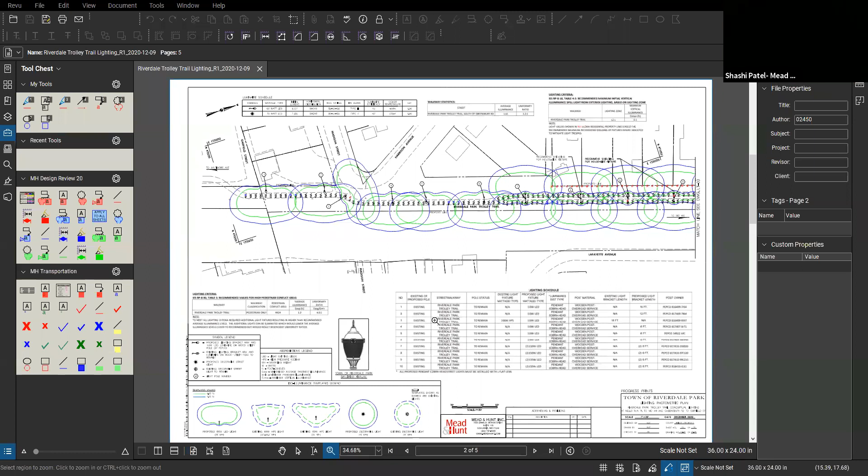Okay, so I'm Jeff Weaver. I'm with Mead and Hunt. I'm the project manager for street lighting for Mead and Hunt. I have 37 years of experience designing and managing street lighting projects, basically anything exterior lighting. I'm also a member of the Illuminating Engineering Society of North America, and I'm a member of the Illuminating Engineering Subcommittee for Standard Practice.

So basically, I guess we can start from south to north. So the town has asked us to look at a conceptual lighting layout in which we would utilize the existing power company utility poles to install fixtures on those poles. It's the majority of the trail. There are some areas where we do not have utility poles available, so we're recommending that we install town-owned pedestrian style lighting fixtures, which is basically this fixture that's on the screen now.

So we did a photometric analysis where we looked at the light levels, projected light levels, I should say, throughout the trail with different locations or layouts of fixtures. And what I mean by that is we looked at positioning the fixtures on the utility poles in different directions to try to minimize spill lighting. So ultimately, the layout you're seeing right now is what we've come up with, which we feel is probably the best we can do with the utility company provided light fixtures.

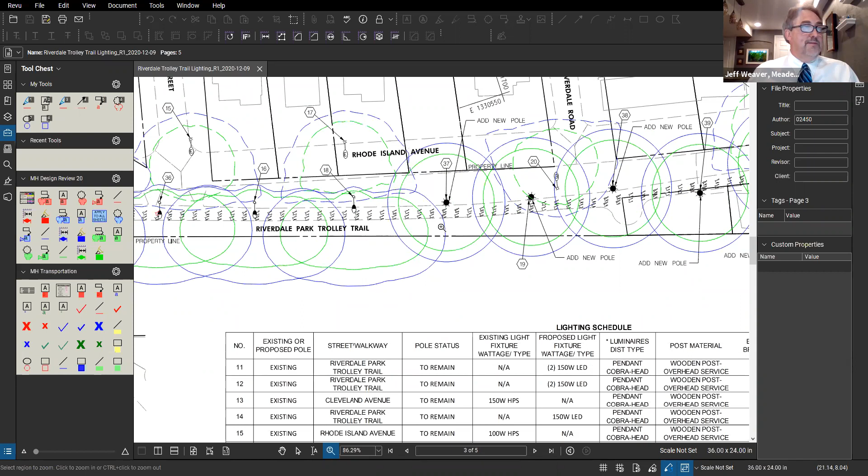Let me see, is there anything else I want to point out? The lighting goes all the way north, up to Wells Run Place, where the developer has already installed a number of pedestrian lights. And that's basically where we'll tie into the path.

As far as the light levels, let me go back here. We looked at the Illuminating Engineering Society's recommendations for lighting on a path. We determined that the path would have a high nighttime pedestrian usage. The Illuminating Engineering Society RP8 Table 5 recommends for high pedestrian conflict 1 foot candle illumination all falling on the path with a uniformity ratio of 4:1.

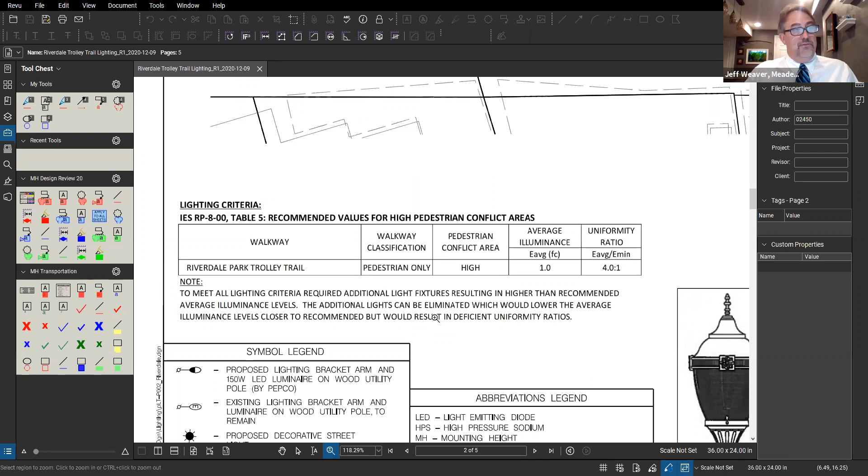When we say uniformity, what we mean is how consistent or how even the lighting is. We don't want peaks and valleys. We don't want areas with bright spots, and we also don't want areas that are dark, because that would allow somebody potentially to hide in the shadows and then attack somebody on the path at night.

The layout that we developed, again using utility company poles, did allow some light spill on some of the residential property lines, as you can see on my screen, mainly slightly south of Queensberry. There's a number of homes, maybe 6 homes, where there is some spill light on the residential property line. There's also an area north of Queensberry, a total of 3 homes, and that's what these red numbers are indicating, with some spill light on the residential property.

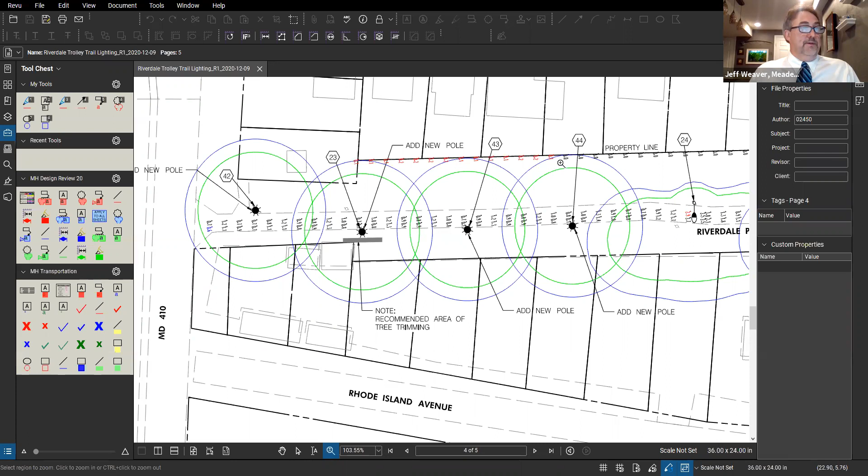As you can see here, the pattern of illumination again is very circular. Along this particular residential property line it's not as bad; it's actually very minor, to be totally honest. The problem really lies to the south, where we have the twin arm structures. There's a lot of spill lighting in this section. One of the problems is we're restricted by what we have available. The utility company poles are already there, so there's not a lot we can do about that if we're going to use them.

One way we could mitigate this would be to provide shielding on the fixtures. Potentially, we could have the vendor change the optics in the fixture, but I would caution, since these fixtures are provided by the power company, we lose some control. The power company really has the say. This is the particular fixture they keep in stock, so they may not be willing to change out the optics or provide a different fixture. So there's a good chance we're stuck with this fixture if we go this option.

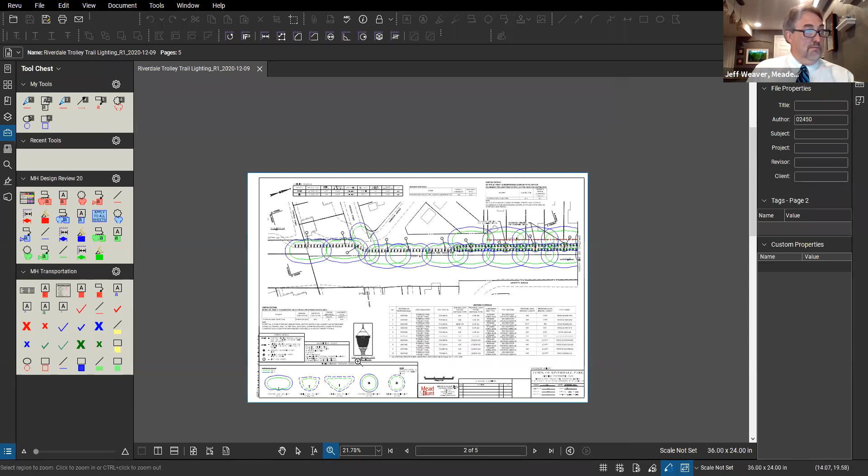I guess the third way to mitigate this would be to not put these in and just put in a pedestrian style lighting system consisting of the town's Washington Globe style fixture. Now, I would caution with that option. I'm not sure if Ivy's on the call yet, but I think the cost Pepco's provided for their lighting is around $48,000. A pedestrian only style lighting system would probably cost upwards of $500,000. So it's considerably more.

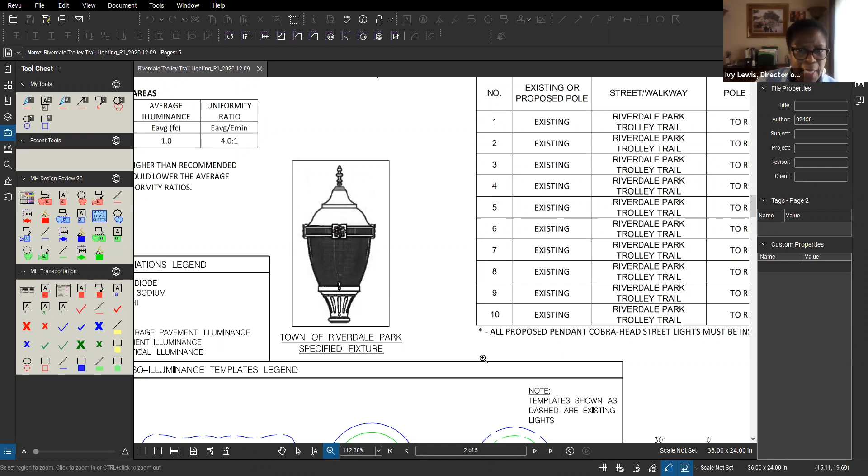I am back on the call. My apologies, everyone. Could you explain why the cost would be substantially higher if we go with pedestrian style lighting or town-owned lighting along the trail? It could be obvious to some, but not to others. Yes.

So basically, let me tell you the difference. So when we have this type of situation, we're using a utility pole that's already there today. The power company comes in and they install a lighting arm and a fixture on that utility pole, and then they charge the town basically a tariff or a lease fee. So the cost is not that great. There's initial upfront cost, and then there's a monthly cost for the energy use and the cost

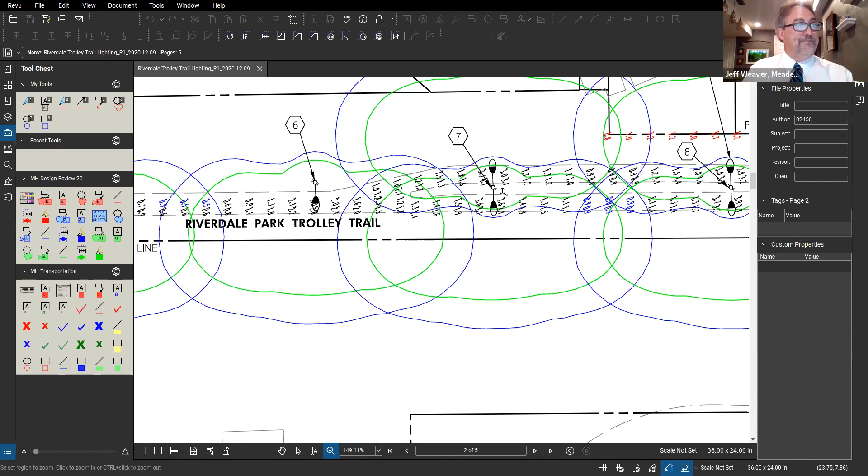for leasing the equipment. When we're talking about a pedestrian lighting system, what happens here is we're paying for the fixture, the pole, all the underground infrastructure. In other words, the conduit and the hand boxes, electrical cables, a source of control. In other words, a lighting cabinet that would turn on and off the lights. Also a source of power to energize these lights as well. So all these components come together. They create a much more expensive lighting system.

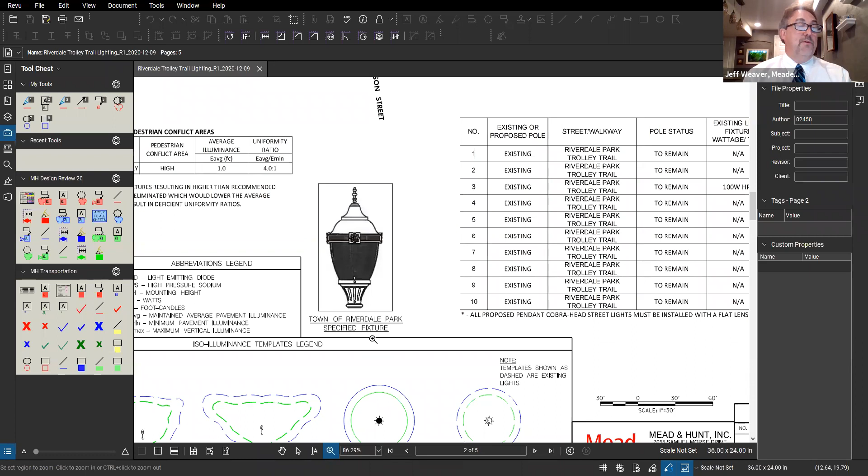But with that type of lighting system, there's obviously a lot more flexibility that you can provide any number of types of fixtures out here. We can go back to the vendor and they can change the optics in this fixture, instead of a circular pattern like we see here, we can actually make it more like an oval pattern, something that falls almost directly on the path. It cuts it off. There's not a lot of this spill lighting.

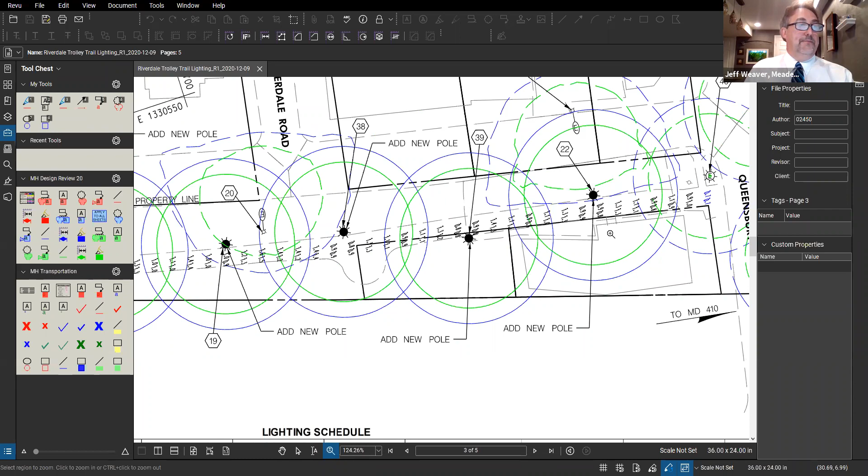So that's the benefit when you build your own lighting system instead of using the power company. We're very restricted by what the power company provides. Does that answer your question? That certainly, yes, provides more detail to what would be involved in extending town lights along that section of the pole and the wiring and all the infrastructure that goes along with it.

And so another downside of that is we have a number, I don't know the exact number, if you do call it out, Jeff, of the number of poles along the entire length of the trolley trail in Riverdale Park. And so to introduce town lighting or intermix it in with that for a different lighting pattern and illumination would just create a lot of pole clutter, if you will, along the trail. It would definitely create a lot of clutter. There's also the concern with color temperature.

If you're going to mix and match with what Pepco has and what the town has, you're definitely going to have two different color patterns. Pepco's is a 4,000 color temperature. And let me explain what I mean by that. So basically, when we talk about color temperature, we're talking about how warm feeling or how whitish the light is. If you're in a 2,000 color temperature, that's more yellowish. And then from that point going up to say 5,000, you get into like a bluish color. Right now, Pepco again is 4,000. The town's fixture is 5,700. It's very white. It's almost bluish. It is quite bluish.

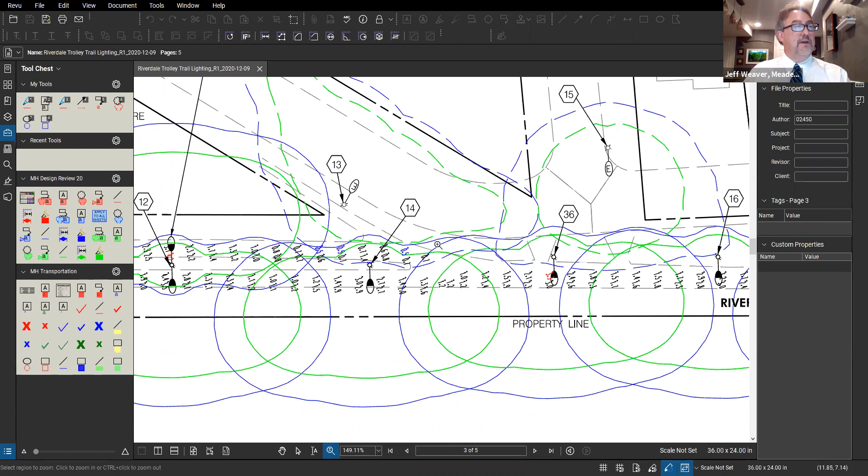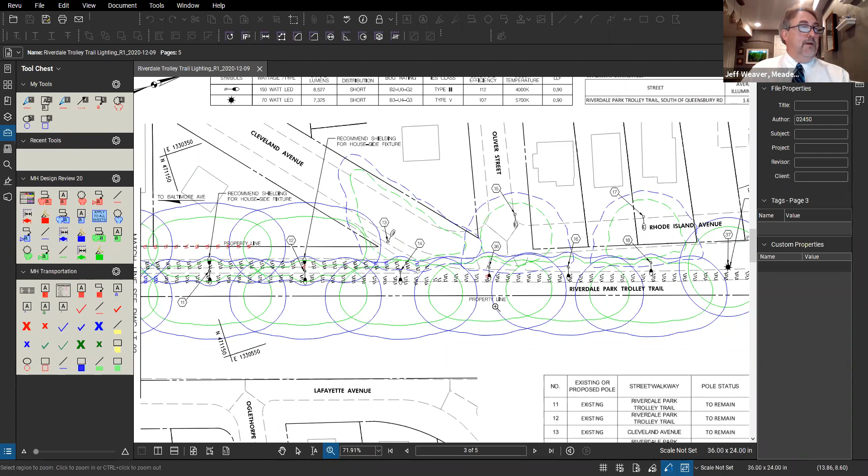Now, the Illuminating Engineering Society has actually gone away from calling these light patterns. Now we're using BUG ratings. So it's basically looking at how much light is thrown forward, how much light is thrown backwards, and how much light is allowed to go up in the sky. But I want to caution, I don't want people to get confused when we talk about color temperature and think that it has anything to do with pattern of illumination. It absolutely does not.

Pattern of illumination is driven by the lumens that this fixture produces. And there's a number of components that actually drive that. The optics in the fixture, the ballast, and how many milliamps that fixture is operating on actually create how much light falls forward, or how much light goes in an elongated pattern left and right, or even on what we call the house side, behind it.

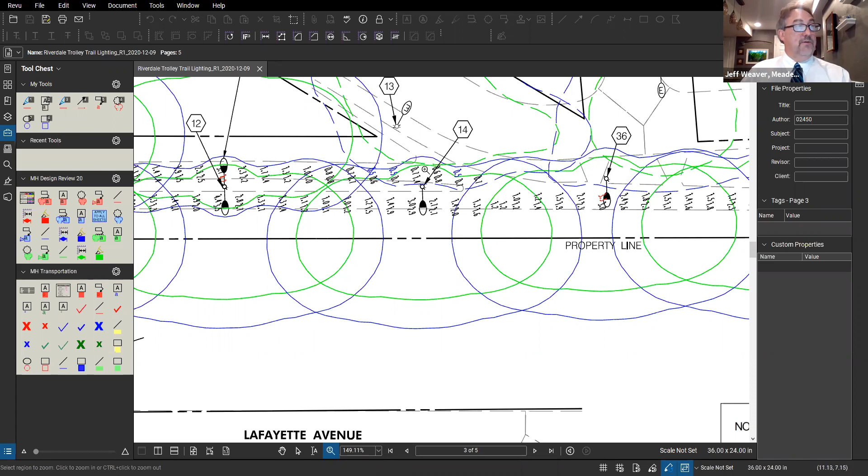As you can see here, this pole in particular, here's the utility pole, the light's facing this direction, and all the light is forward of the fixture. But there is some light that we call house lighting that falls behind it. But again, this is Pepco's fixture. This is what they provide.

I do want to point out, as you mentioned, but I just want to reiterate that in the current plan, there are two color temperatures. Within the town center and where the new pedestrian lighting or town-owned poles are proposed is one temperature in a concentrated area. And then on either side of that, it's the lower color temperature of the Pepco light. So it's not so variable along the trail, but it does vary right before and right after, or around the town center, I should say.

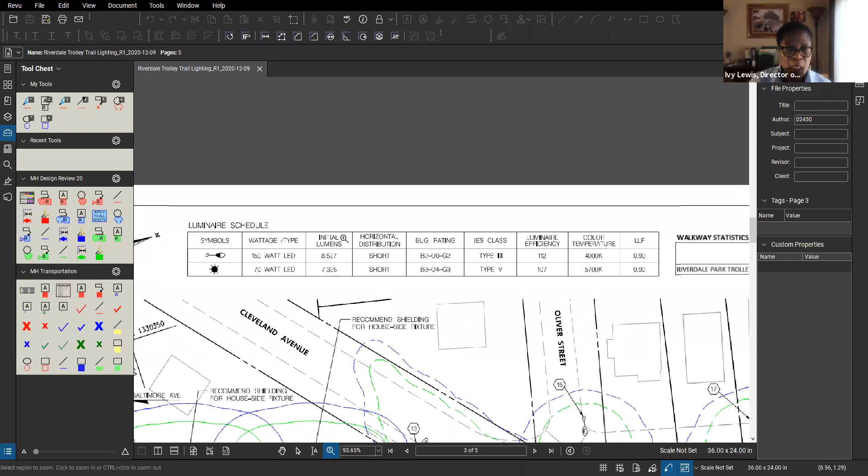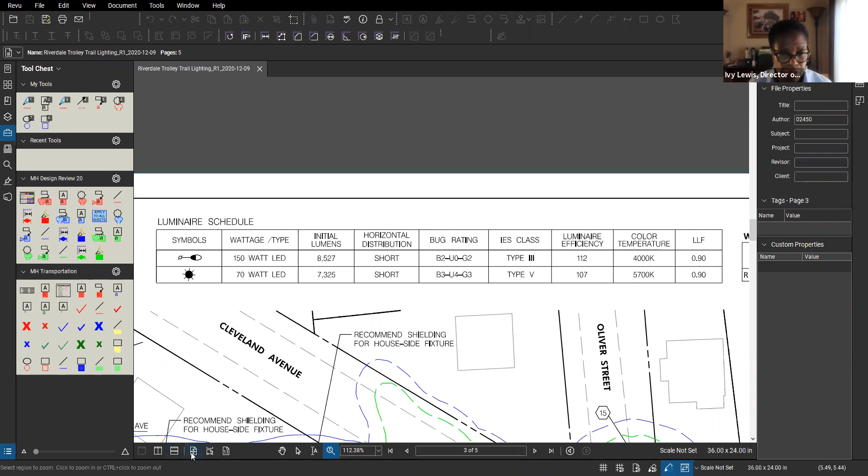Correct. The town center, and it makes sense, high pedestrian area. We have a lot of locations of interest. We have that lighting there now within the town center, and to a less extent under the overpass. That would be extended a little beyond that where the new lights are being proposed, and then it would drop down to, if you will, the warmer temperature on the Pepco poles in both directions. Yeah, so basically, that's correct.

Everything that's in this area we're not showing because it's all existing. There's all town-owned lights in this area here. These are the pedestrian lights, and there's actually a few, I think 2 or 3, that are underneath this underpass here as well. So then when the path starts off on the north, it kind of ties into that same style of lighting until we get to the utility poles, and then we transition to just utility company lighting to the north.

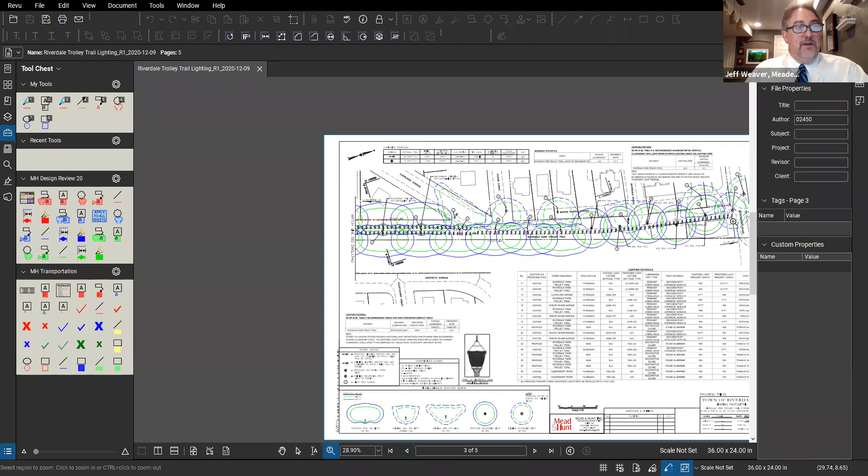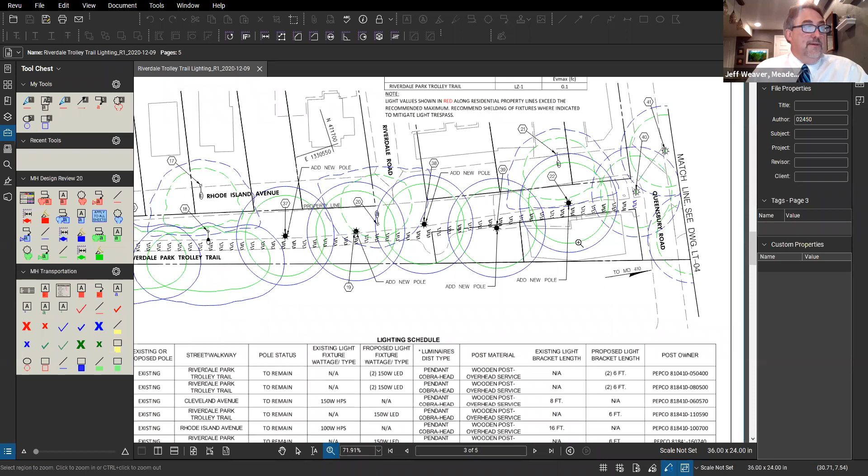The same thing from the south side. As you can see where Queensbury is, there's existing pedestrian style lights that run up and down Queensbury, as well as onto the match line here, the town center. And then to the south, we tie in with some of these pedestrian lights before we go into the utility company lighting. And the main reason we did this, again, we don't have any utility poles in this area that we can utilize to put utility company lights on. If we don't do something, this whole section of the path would be basically dark. And the same thing to the north, the start of the path in this area would be dark because we just don't have any telephone poles to utilize.

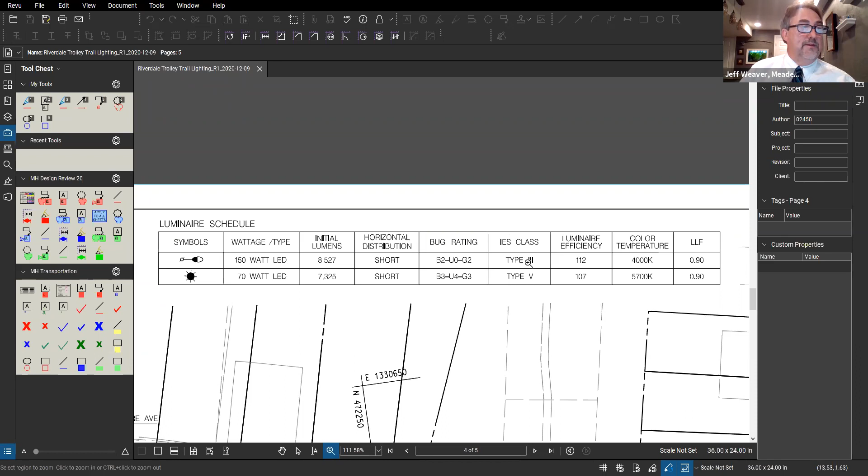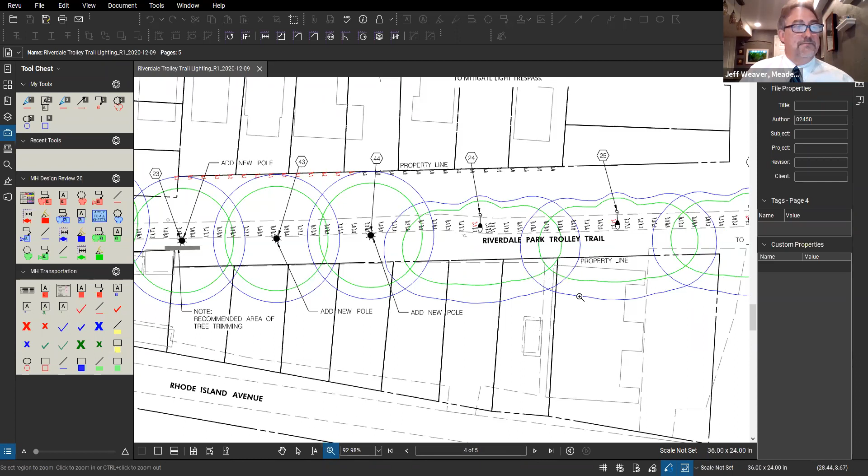And by the way, I zoomed in on it. This chart up here gives you the color temperatures for both the fixtures. So this is the Pepco light over here, 150 watt LED, has 8,500 lumens, and it's 4,000 color temperature. And then the town's is a lower wattage fixture, 70 watts, 7,325 lumens, and it has 5,700 color temperature, which is more bluish. And again, these are the patterns of illumination I was talking about, the type 3 and the type 5. This would be the type 5, the round, and then the type 3, I guess I want to say egg-shaped. It's an easy way to say it.

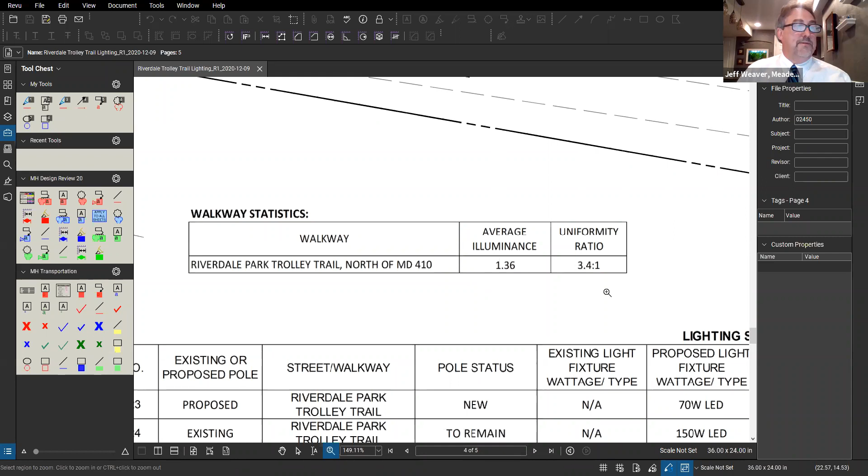I guess generally, I think that's it. Other than, I want to point out, as far as the light levels on the path, with the layout that we have right now, we're slightly above the minimum recommended. The minimum recommended is 1 foot candle. We're 1.36. So we meet what the Illuminating Engineering Society recommends. And then the uniformity, this is a maximum number. We don't want to be over 4, because if we go over 4, then we'll start seeing some dark spots or bright spots. Right now we're 3.4. So we meet what's recommended.

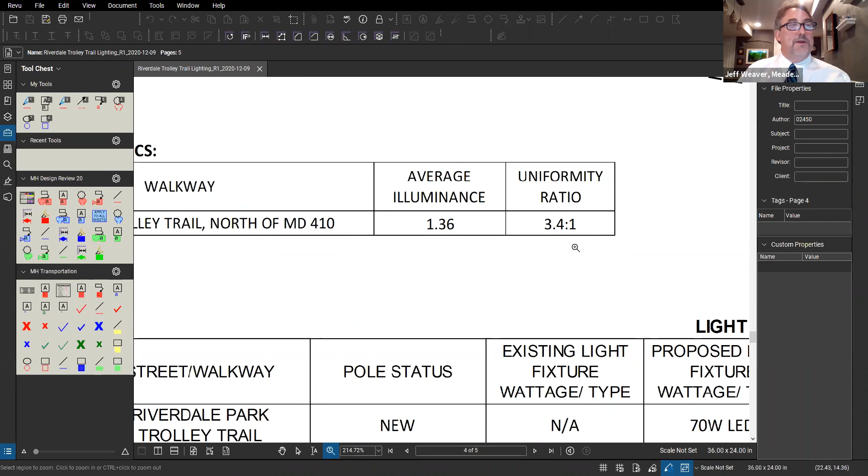Okay, so the lighting system that we're proposing here pretty much meets every aspect of what the town is looking for, except we've got these couple spot areas of light trespass or light spill on these residential property lines.

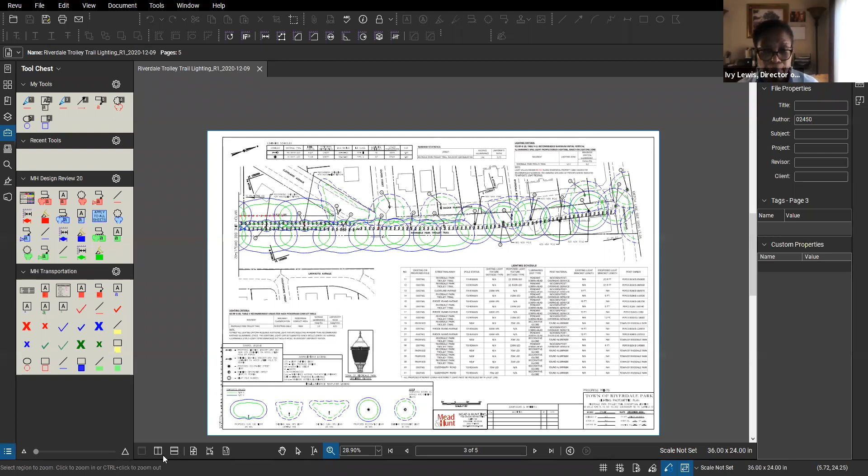So, I don't know if there was anything else you wanted me to add to that, Ivy? I'm going to say no, and maybe if questions come up, you could provide additional information. Since I fell off, that was a first to lose internet access completely, I did want to make sure to share with attendees the objectives and the thinking behind, or what guided the effort to prepare this plan.

Clearly making the trolley trail safe for all users and encouraging increased use of the trail, including after dark, to businesses and other points of interest, are major aspirations of this project, as is minimizing the impact on adjacent properties. Some of the other objectives are using energy efficient lighting, establishing appropriate light levels adjacent to single family homes, and utilizing existing poles to the extent possible to avoid pole clutter, while at the same time only using the minimum number of Pepco poles and supplemental town lights necessary to adequately light the trail.

I will mention that these goals and objectives are consistent with a study I learned about just a couple of weeks ago. It was a crime prevention through environmental design study completed by the College Park City University Partnership in 2017. The study focused on making the trail safe along its entire length through College Park, Riverdale Park, and Hyattsville. And as we know, except for in the Riverdale Park Station community, where the last section of the trail was built and lit over the last 12 months, most of the section of the trail in town is without lighting.

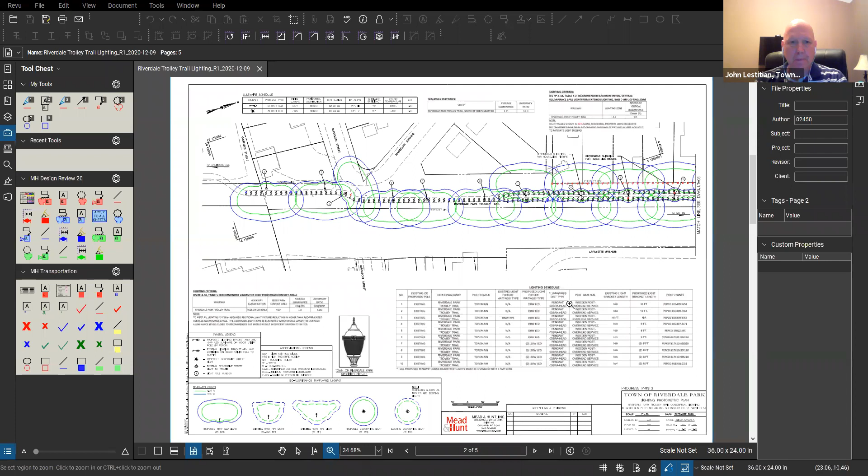And Ivy, there's a number of questions in the chat box. Okay. So if you could take a look in chat and respond to those. Okay. Let me start from the beginning. When is the proposed installation date?

The town, as Jeff mentioned, has to do all of the design of the wiring and supporting infrastructure for the town lights. So that has caused us to break the project in two parts if we proceed according to the conceptual lighting plan. So we would get out the box first with the 33 Pepco lights on, I think it's 21 Pepco poles. Once the town signs a cost letter that Pepco has already provided, and pays the $48,000 cost of installing the lights on the poles, they'll get started, and we could expect to have them fully installed within 6 to 8 months. The timeline for getting the town lights installed has not been established.

We have to first determine whether the existing infrastructure, for example, there's a control box in the town center, we have to determine the capacity of that to support additional lighting. And if not, we'd have to do the engineering on installing another control box and extending wire to the lights, or maybe multiple pedestals, rather than a control box of the size that's in the town center, on either side of the town center to support the lights that are proposed there.

So we could definitely have the Pepco lights in place before the end of the year, maybe even the end of September, if we get a cost letter signed within the next couple of weeks. And I would be venturing a guess to determine when the town lights would be in. Ideally, we'd have those in before the end of the year. Next question, or any comments on that? Okay.

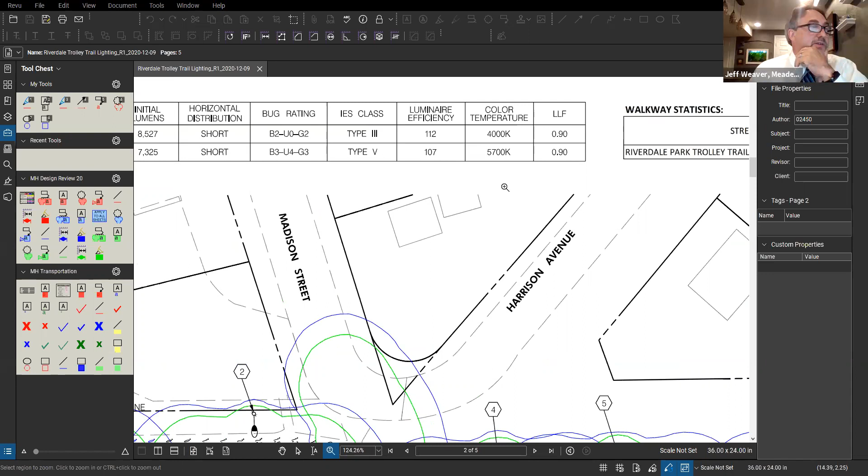So what light is more energy efficient? We're proposing the use of LEDs. Do you want to address the other options here? So the town, okay, go ahead. I could just point out real quickly, if you're looking at the chart, the Pepco light is actually more efficient, but just slightly. The Pepco light has a 112 efficiency and the town's light is 107. And that's because they're both LED light fixtures. If these were incandescent or high pressure sodium or something like that, this number would definitely be way down in the 60 or less range.

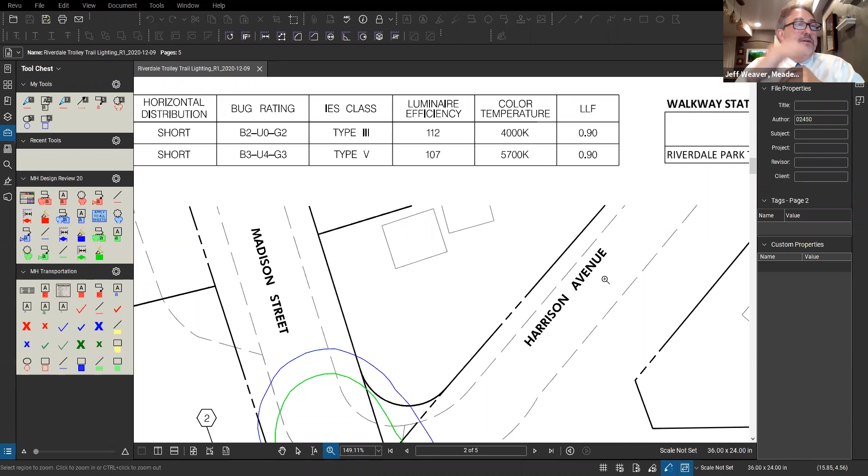Okay, the next question, what is the height difference between the pedestrian lights from the town and the Pepco lights? So the Pepco lights are generally installed around 26 feet. That can vary slightly depending on what the power company has on their utility pole, but they do have a designated area on the pole that's around 26 feet. It can be as high as 30 feet. But that's really up to them to decide.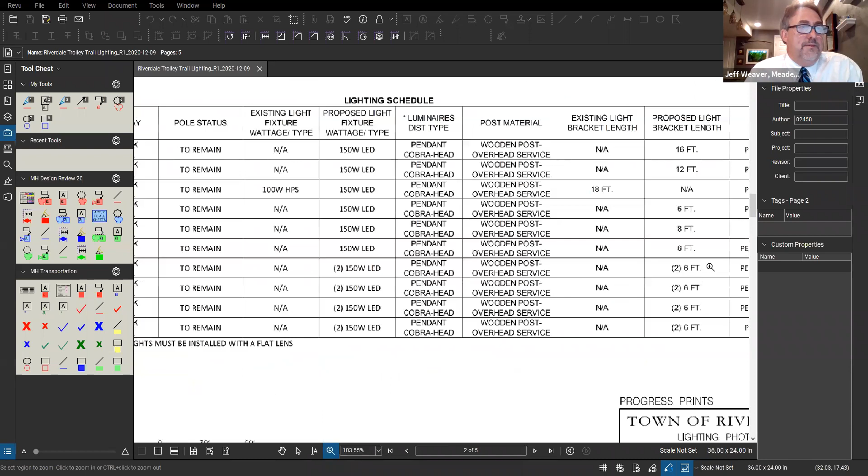The town's pole, let me make sure here, I believe it's 16 feet. Wait, is that right? No, that's not right. It's on the chart here. I believe it was 14 feet, but I want to make absolutely sure. We put it on the chart.

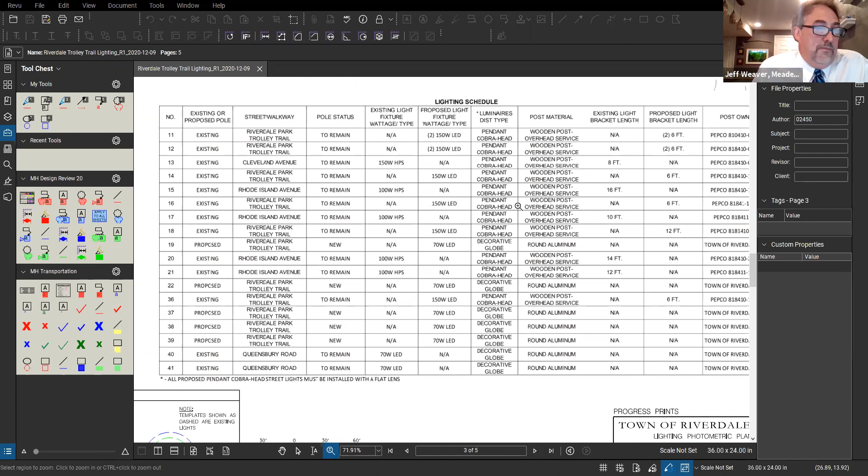Okay, next question: why can't the town lights use the same temperature lights as the Pepco-provided lights, or at least a temperature closer to 4,000 kelvin? Well, I think that's really a choice with the town, Ivy. The vendor can definitely supply a light fixture with a lower color temperature.

However, I will caution, and I think you said this before, you've already established this color temperature in the town center there. And then on both sides of it, if we do that, we're going to be introducing a color temperature that's going to be slightly lower than what's already there today. Is that a big deal? I would say not necessarily, because you're going to be tying into the Pepco utility company lights, which are also already a lower color temperature.

So really, I think it's up to the town to determine what color temperature you would like to have. And I don't have the background to know what went into the town's decision to get the color temperature we have now. And we have some incandescent lights in our system. We're converting them to LED, maybe 10 to 12 a year. And we could certainly look into it.

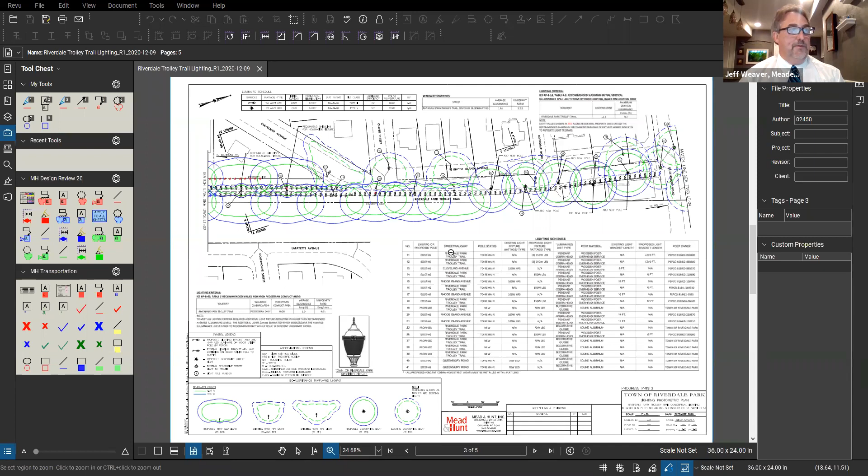I think we're getting into the colors and temperatures. What does that really look like is what I'm trying to understand in these transition areas. I'm not sure if we could. I'd have to look back at that and see if we can't get some photos of other areas.

Yeah, I know we can get photos of areas where we have Pepco lights, and I know we've got photos of areas similar to what the town has today. I don't know if we have them as a transition where we could see how it looks with them together. Yeah, I just think we're talking about such little differences in color temperature when you look at the two and when you're walking along the trail. Maybe it's just me, but I'm just trying to understand that.

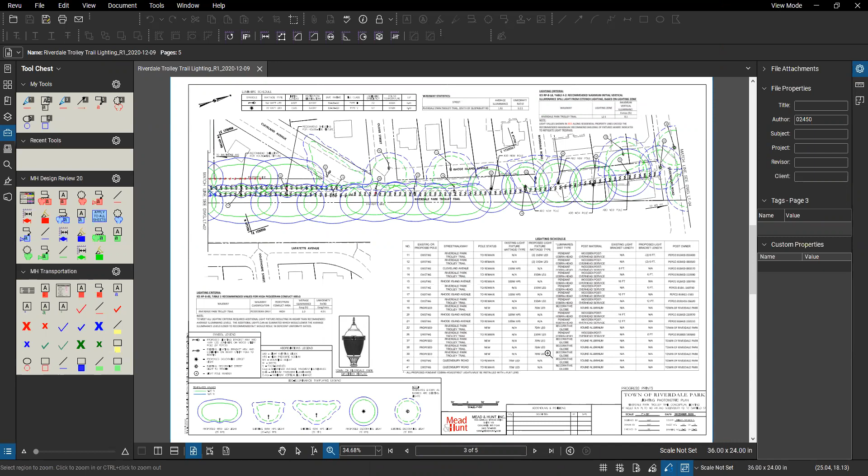Yeah, and I do think that because these are so close, they're not going to be that different. Basically, what you're going to see is a white light and a blue light. That's the simple way to say it. If you wanted to see a yellow light, we'd have to drop this down closer to 3000 Kelvin, and that's a starker difference than the color temperature differences between the town and Pepco. Very noticeably different.

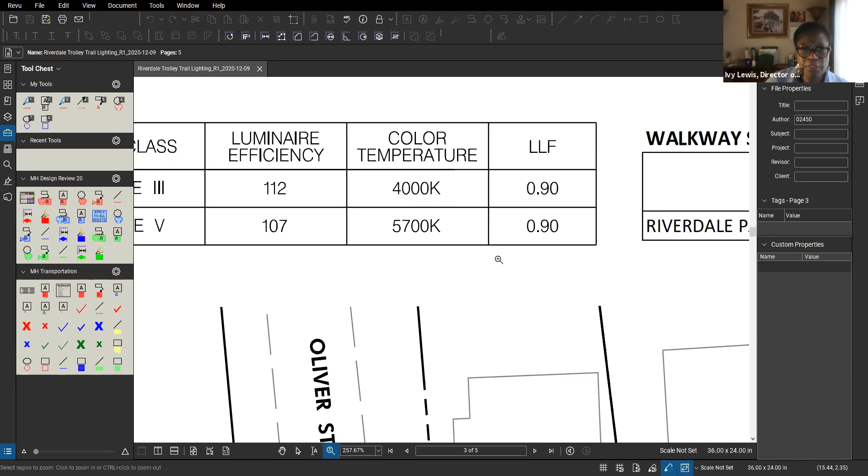The next question, coming from Facebook: are the lights on all the time or motion activated? Will there be emergency call boxes installed? That's actually a good question and one that we haven't discussed. That could be done separately, following, or at the same time if we can get enough information, depending upon the cost. I'm not sure if they have them elsewhere along the trail, so I want to start talking with College Park and Hyattsville, because if they do, they can give us a clear path to how we might get them installed.

So this plan proposes lights that would come on at night and stay on until sunlight. Yeah, and the section that we just did for the State Highway Administration does not have call boxes. Now I will say, maybe that's why they wanted it, but the town did ask for an empty conduit system with hand boxes installed for future use, and that may be what they're going to use it for. They didn't indicate what it was for, but we did provide that. Okay, I passed over a question. Did you answer the first part of that?

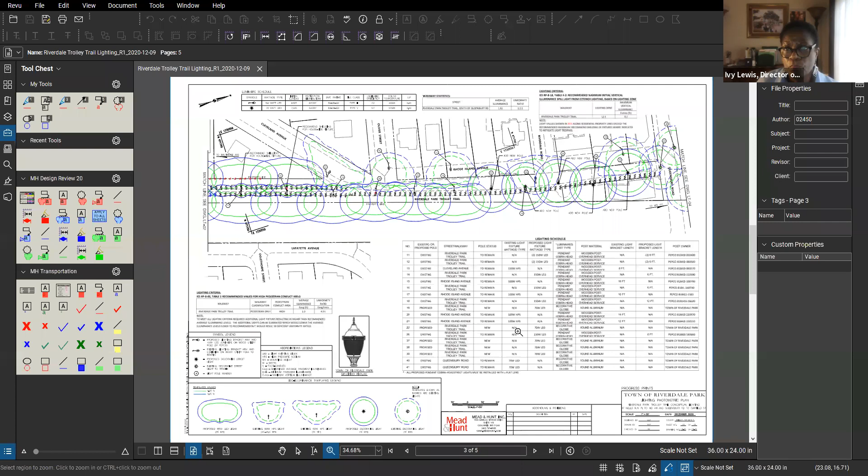Yeah, in terms of it being on. There was a question about whether the trail will be closed during the process. I expect to some extent it will have to be when the lights are being installed. I'm not certain that it's the full 6 to 8 weeks, but I will inquire of Pepco. Yeah, I would expect them to close spot locations to install lights on the utility poles, but that's going to be a pretty quick process.

It definitely would not take as long as it would be for a contractor to install the town's lights. That's going to take a little bit more because it's going to be more involved, because the underground conduit has to be built, and the hand boxes as well, with all the wiring and all the connections. The power company's part is just to stick a lighting arm on the pole with a fixture, which they'll do with a bucket truck, and then it'll just tap into their already existing wiring system. So it shouldn't be as significant.

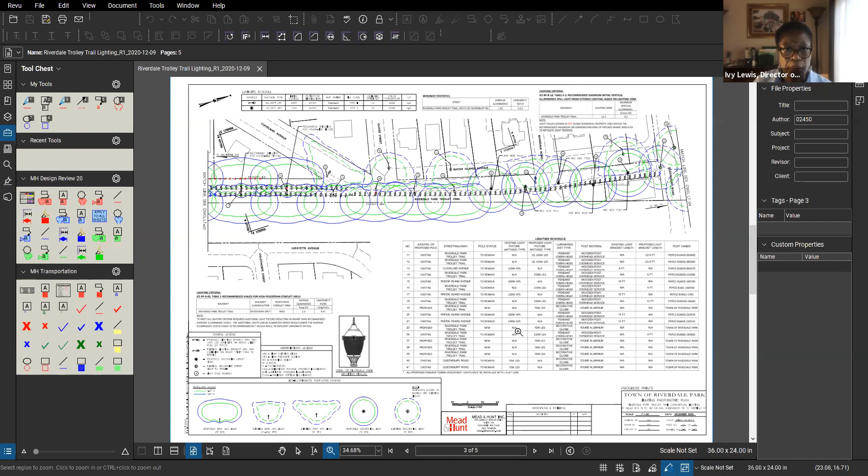I have another question. Can you discuss compliance of these fixtures with International Dark Sky Association standards? And also the possibility of shields for the southern houses that are seeing a lot of intrusion? Well, neither one of these fixtures falls on the International Dark Sky website. They don't support or recommend either one of these fixtures. And again, we have no flexibility with Pepco. Pepco's gonna provide what they have in stock.

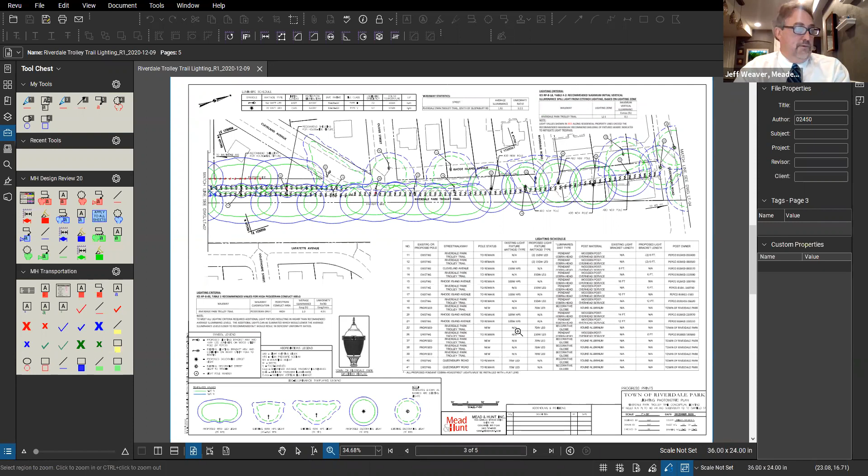I will say with the town's fixture, if we wanted to go that route, we could select a fixture from the recommendations provided by the International Dark-Sky Association. We have done that before in Washington, D.C. We did an award-winning project for DC where we analyzed a number of fixtures, and the fixture DC chose was recommended by the International Dark-Sky Association, and that fixture does have a considerable amount of cutoff light. I don't have the photos right now, but I think Ivy, you have those photos of that project where the light cuts off right at the edge of the path.

But again, that's a completely different style fixture. It's not a Washington globe. So you would be changing the aesthetic or the appearance of your fixture if you went with something like that. And the objective of most of them is, like you said, to aim light directly down onto the path surface. Yeah.

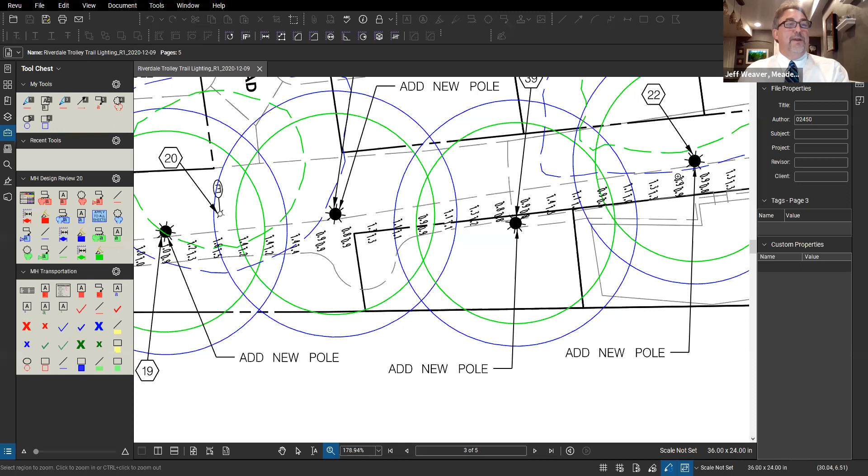And I will caution that it did cost DC a lot more money, because the pattern of illumination was a lot smaller. The spacing has to be decreased, because this longitudinal pattern of illumination actually goes down when we change those optics to force that light directly down on that path. That makes this pattern a lot smaller. So that increases the number of fixtures. Thus, the cost of the project goes up considerably.

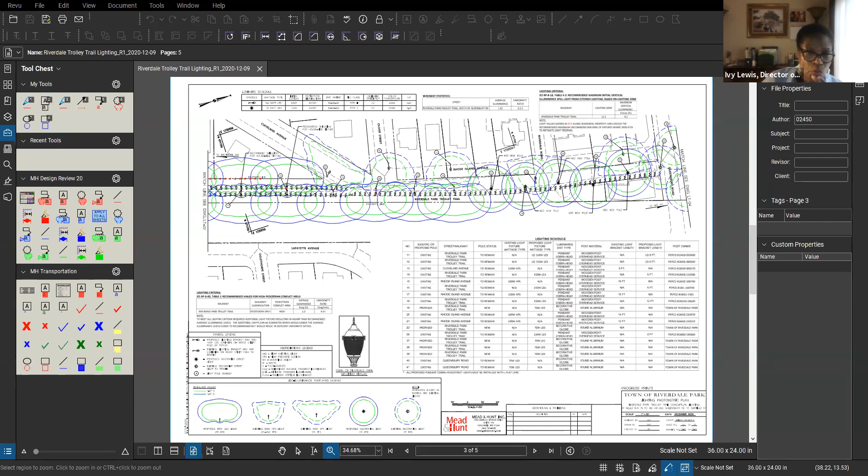And so the image that you shared with me, and unfortunately I don't think I can put my hands on it directly, had the light cutting off at the edge of the pavement. And there was a wooded area on either side of that trail that was pitch black. Yes. So from a safety point of view, I think we've compromised the situation a lot to do that. We have wooded areas on either side. We have railroad tracks south of the town center on one side, and some vegetation on the other that's pretty dense, and so the trail would be lighted, but the area immediately beyond it would not.

You might have to stop sharing and then reshare. Oh, okay, let me try that again. Let's see here. Did it share? Is it sharing the image? It is. Okay.

And it was a path, it was actually a roadway that was converted into a pedestrian trail, and it was heavily wooded on both sides. There's some streams out here, we had some decorative bridges that were built as well to go over the stream. But as part of this, we had to put in pedestrian lighting for nighttime usage.

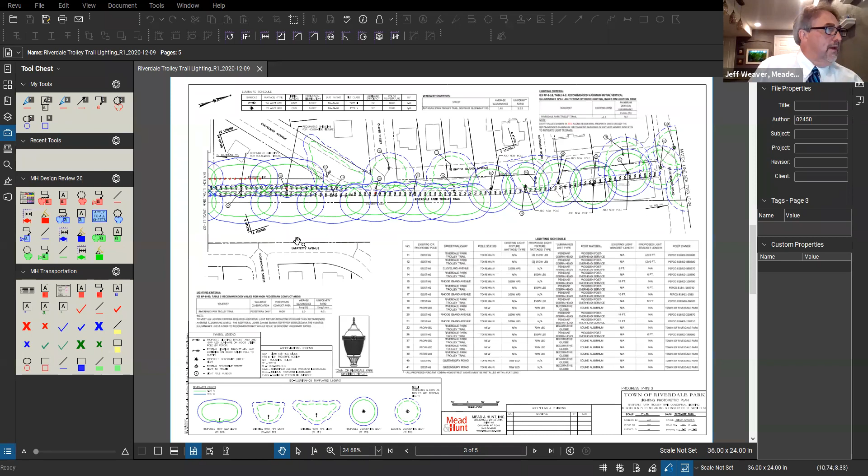Okay, can you put the plan drawing up and go all the way to the southern boundary of town? Southern, and you need me to share it, right? Well, I don't, but everybody else does. Share. Let's bring that back up. I think we're at this. Southern end. Here we go. Are we talking down in Garfield Street? And that's Madison and Harrison, very sharp corner there.

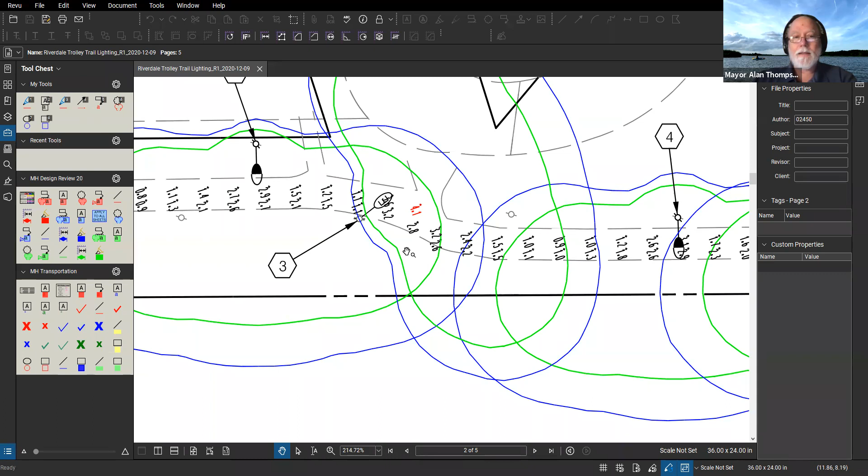Yes. So southernmost location. Fixture number 3 is putting most of its light actually on the street and not onto the path. And it looks like the path, based on the blue lines, is 0.15 foot candle, as I read the drawing. And they are overlapping over the path. I'm looking at the overlap between 2 and 4, so presumably they add up to be 0.3 at least over the whole region. And since the 0.3 seems to be the boundary, it looks to me like we don't need fixture 3 in order to light up the path.

Let's see here, is that? There might be, and I'm pretty sure there will be, but anyway, if we eliminate this fixture. And by the way, let me explain this fixture. This is existing today. The only thing we've done is we've recommended, since we're going to have all these other lights added to these utility poles, we want to be consistent. We want to upgrade this one to an LED. That's all we're recommending here, not a new one.

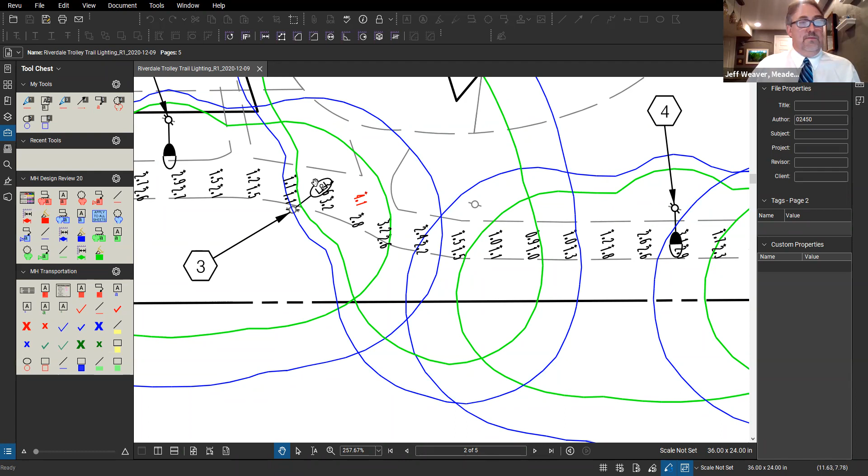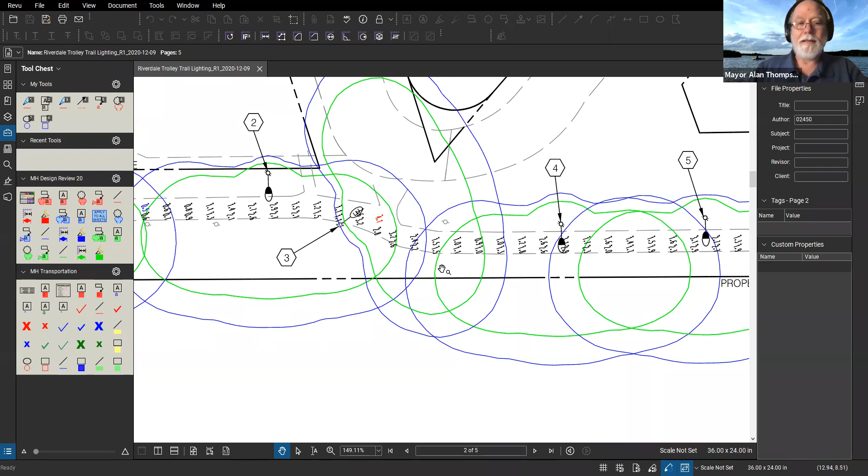Okay. And again, I believe this is here today not for the path. I think it's really for this curve. Again, I don't know much about this. We didn't talk to Pepco. I'd be hesitant to just simply take this out because there may be some other reason why this light was here. So it's a new fixture, but not a new light that doesn't exist right now. Correct. Yeah, it's there today. It's just a high pressure sodium right now.

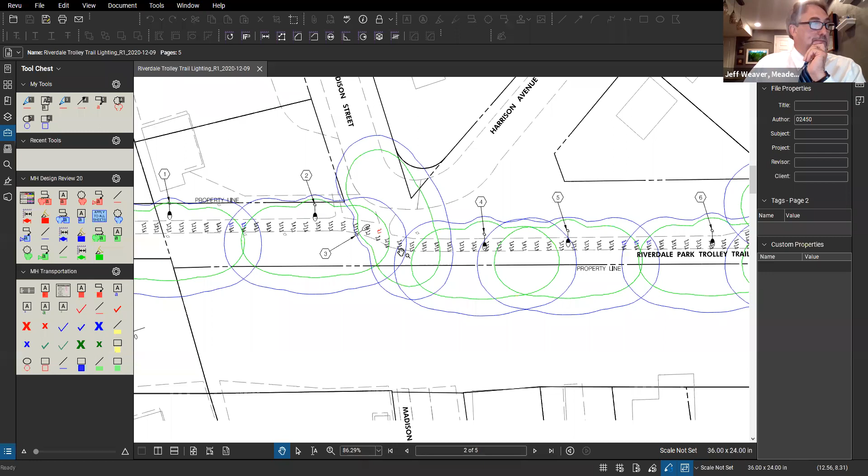We're recommending LED. I will say this, looking at these templates and how they're overlapping in the overlap region right here, we would have a little bit of a dark spot right here. But it's not going to be really noticeable, to be totally honest with you. Preferably, let me give you an example. We want the green areas, which is the average right here on the templates. We want them to slightly overlap. That's like a perfect scenario right there.

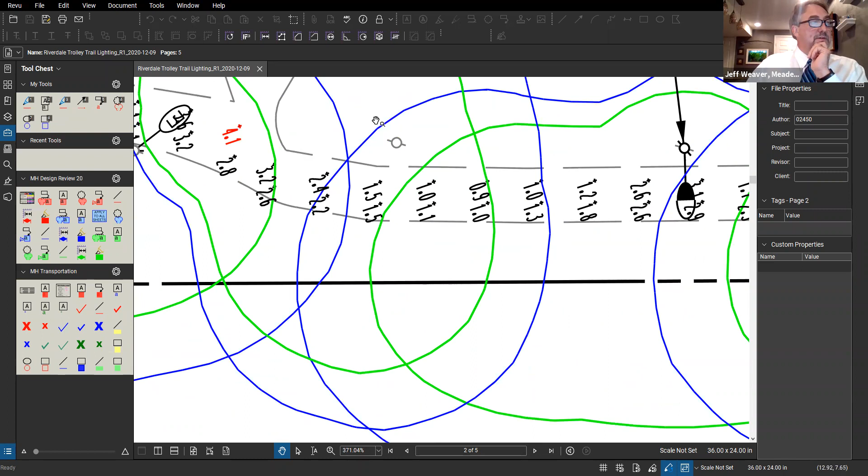This particular one, this blue is half of the average, or I mean half the min. Sorry. Well, the green is labeled as being 0.3 foot candles, and so yeah, that's the minimum. Sorry, I misspoke. Right. Yeah, that's the minimum. And then so we show half the minimum in the blue. That's what that is. Right, but half the minimum, but there's two lights that are overlapping with that, and so the minimum in between those two is how I add it. The two profiles add over the top of each other.

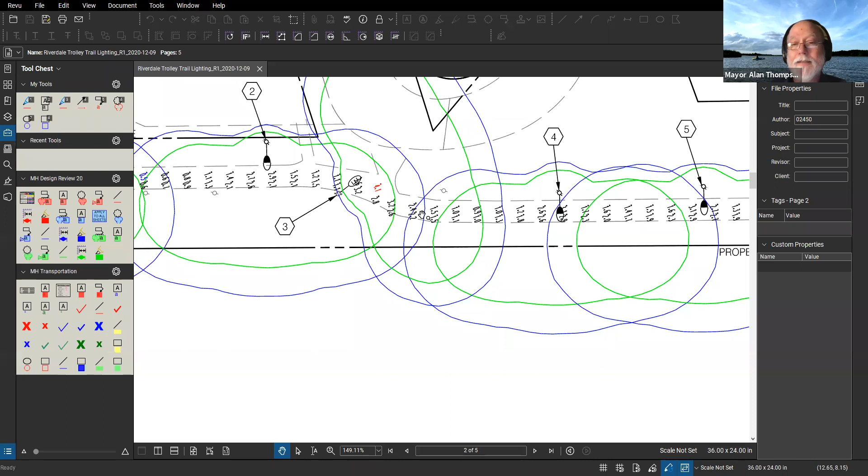But it's as you say, that light 3, I lost track of the number, sorry, is an existing light. It's just going to make it a consistent appearance along there. So I'm okay with that. So that's fine for that question. So now let's go to the entire opposite end of the project, the very northernmost light up at Riverdale Park Station. So that's at Wells Run, is the 35.

Right, 35. I've been talking about 35 for a long time during this project, and part of what I'm thinking about is looking at the pattern of existing lights up there. As you can see between the existing two lights that are just, let me get my directions correct here, just to the east of 35, they again have that same overlap that you mentioned. So it's at the 0.15. It overlaps to give you 0.3, and there are lights going up the path that are more or less a consistent pattern from there that were put in by Riverdale Park Station that again, eyeballing it, barely overlap and give you maybe the 0.3, maybe a little bit less than the 0.3 foot candles at some points along the path.

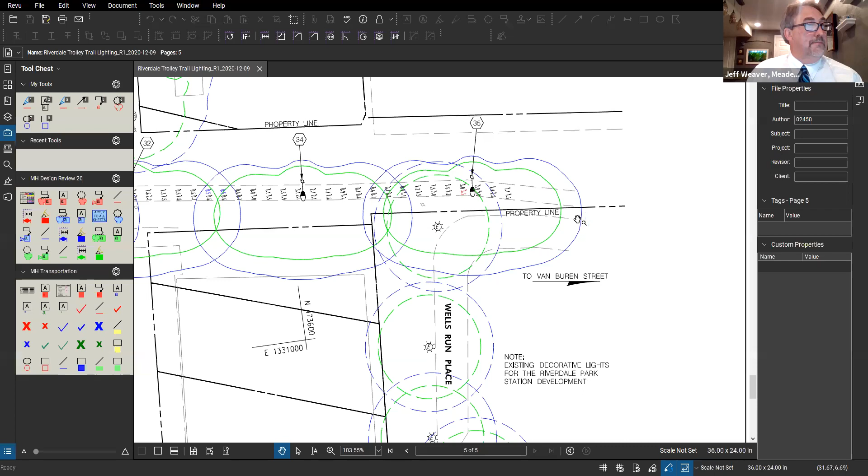Ivy, we talked about this one, right? Yes. And I did go back and I modeled this again. I added the existing light that's to the, I guess it's to the north here, on the roadway, actually, not for the path. And I did notice I took this out, and what happens is, depending on where we want to stop the lighting for the path, there is a slight dark spot because I guess what the developer was trying to meet for the light levels here is different than what we're trying to meet on the path.

So right. These are spaced a little further apart. So yes, when I took this away, there was a slight dark area right here, and then the rest of this path really isn't lit well. So I mean, again, it's really up to the town. I don't personally have an issue with taking this away, because again, I agree that this does have a lot of coverage and will light this. But again, it just has a slight dark spot right about here.

So, yeah, I think that on the eastern side of the street, I think there's a light there also. I'm going to Google Street View it now. It's right about where my cursor is, somewhere up in here, I think. Yeah, and so that casts a little bit of light down there, but it's definitely not.

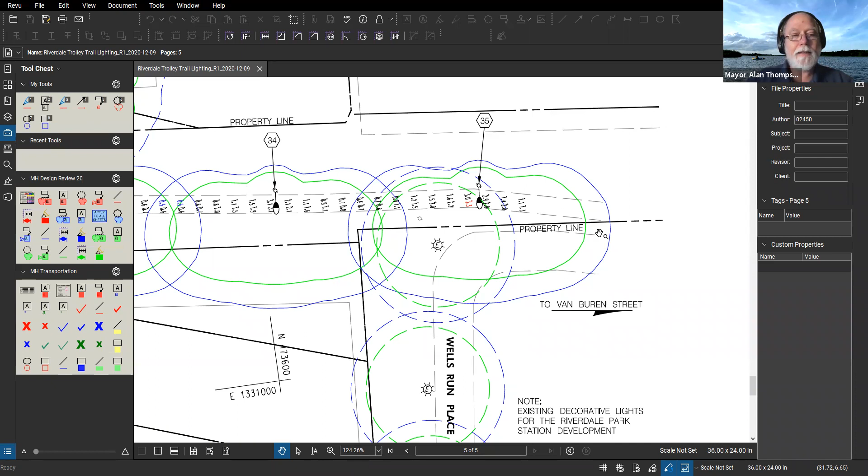I did add that back after we developed all this, and then Ivy brought this to my attention, and we did add that light in now in our model, and we reanalyzed it and noticed that if I took this light away, there would be a slight dark spot. But then again, I wasn't exactly sure where to end this lighting in the first place. We just defined that as Wells Run Place, but could that be back here? Could that be back here?

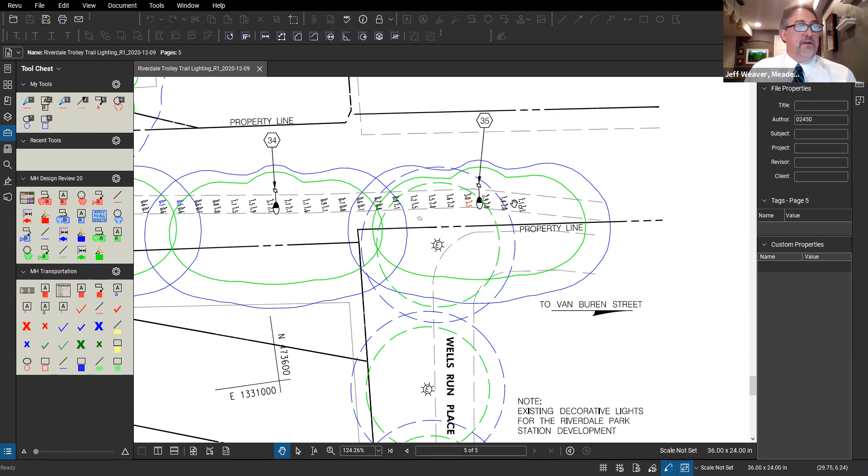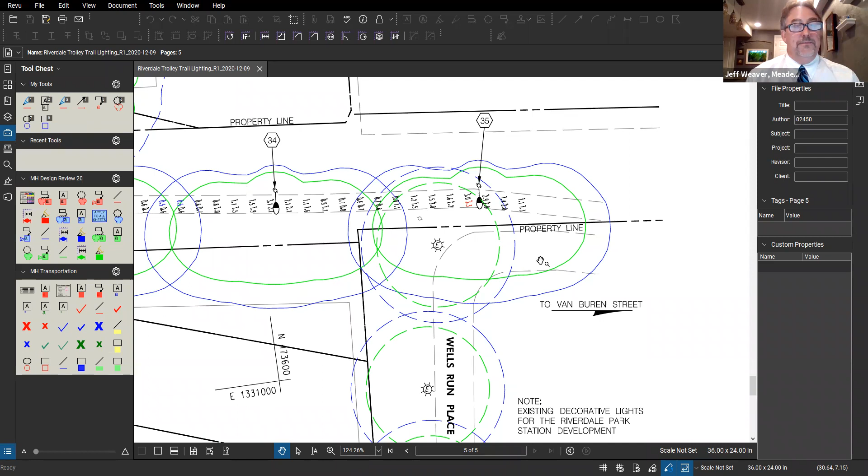The bottom line is we could take this out, and this light over here will provide illumination of the path. Like I said, it'd be hard to even notice the dark area that's here. It's not even going to be that dark. It'll just be slightly darker. Okay. I think that those are my questions.

Okay. I'm back in the chat, and Laura pointed out these wooded areas are not very deep. Hold on a minute. These wooded areas are not very deep. Either is part of my point. I'm not aware of those areas harboring criminal activity. And then she provides a link to a graphic of the impact of the fixtures.

If I could share my screen. Yeah, it's not doing it for me. Can you pull up that link, Jeff? Yeah, I can. Let me see if I can find it here. There you go. And so the other part of the question is related to the type of fixture, that 1 through 5 rating you talked about?

The town's fixture, visually, I would say, is probably in between the bad and the better. So it does cut off light, but it does allow some upward illumination. It's not anywhere near the best. The best would be that example I showed earlier in DC of that one fixture that cuts off right at the edge of the trail. The very bad would be the fixture that Dark Skies indicated, your old traditional Washington globe that had no cap, had a clear globe, and allowed light to go everywhere. So that would be very bad.

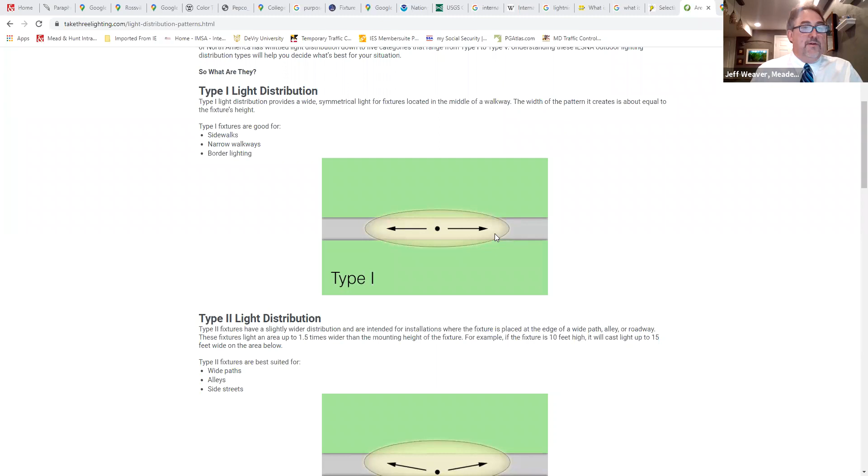So again, a type 1, as you can see, if you can imagine, this would be our trail. A type 1 would basically follow the trail. It's very longitudinal. Light falls right on the trail. Type 2, we're now allowing more forward throw of the light, and there's a little bit of house side. And then they just keep going in that manner. As you drop down to type 3, there's a lot more forward throw. Right now, the Pepco light is a type 3. And so this is what we're modeling right now.

And then a type 4, we're starting to get symmetrical. There's a whole bunch of forward throw, a lot of light trespass. And then this is what the town has, a type 5, where it's just light in all directions. And that's basically the simple way of explaining that. So if you think about it, if I was to put a shield on, say, a type 5, it's not as effective as, if I wanted to light this trail, why don't I just use a type 1? Because then I know all my light is falling on the trail and there's hardly any light going on either side.

So yes, to answer your question, I would say changing the pattern of illumination first, then applying the shield. But in this case with Pepco, unless there's some way to twist Pepco's arm, I don't think they'd be willing to change their light, because that's the one that they keep in house, they keep in stock, and they supply all over their supply area. And if they were to start entertaining different towns and municipalities with their particular fixture, then they would have to have a massive warehouse of all these different fixtures, and I don't think Pepco is going to do that.

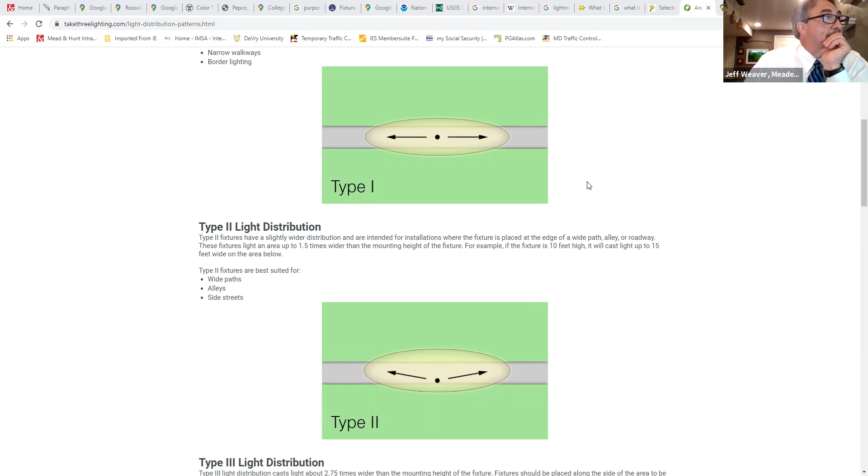So I don't want to speak for them. I just know from a lot of the lighting we've done with Pepco, they are pretty rigid. They don't offer much flexibility. Any other questions?

Okay, so we have a couple of follow-up items: locations or examples of different lighting schemes, if you will, in other parts of town. So Jeff, I'll rely on you for some of that, and I'll add locations that I'm aware of. I would encourage everybody to at least check out what's going on in Riverdale Park Station and immediately north of that in College Park. And we'll post the information on our website probably within the next couple of days, or at least by maybe Friday, hopefully sooner.

Anyone want the last word? So from me, Ivy, you just need me to see if I can get examples of locations showing these fixtures in their color temperature, right? Right. Well, if you have some images as well. Or some images, yeah, that'd be good. Yeah. The manager, were you speaking?